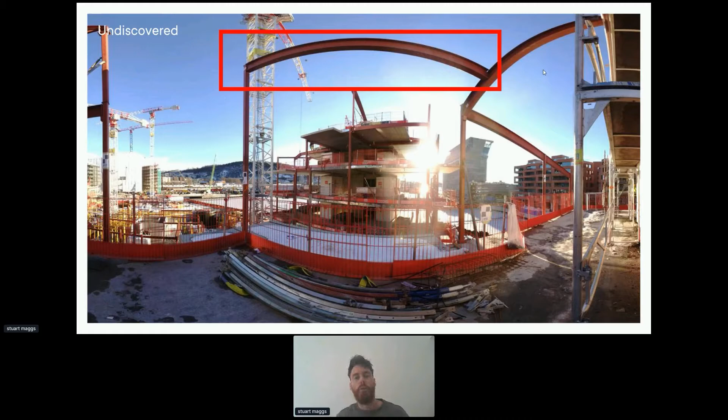This is essentially the cost of doing business, that all of us within the industry accept that these kinds of things pop up and you deal with them ad hoc as they come and put your project at risk. But the really crazy thing about this particular issue is that this was automatically flagged up by our AI-powered software platform so that this issue could get fixed at no extra cost while the subcontractor was still on site and critically had not yet been paid for the work. So essentially, better information to make better decisions to be able to de-risk the project.

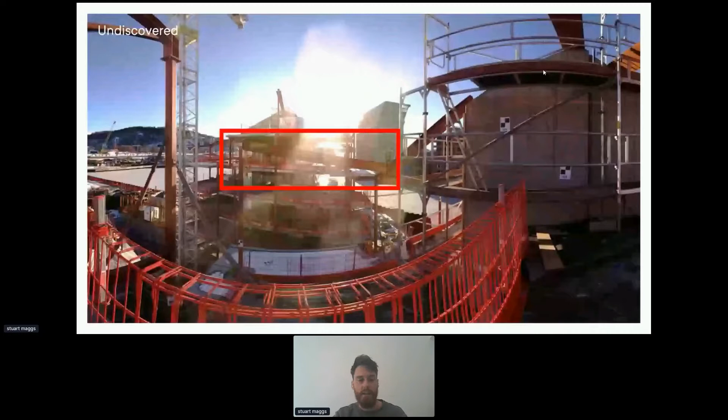But why did this even happen in the first place? Let's take a couple of steps back and ask ourselves, why did this happen? And we believe one of the problems within construction, not all, but definitely one of the larger problems, is that whilst we're designing digitally, we're still constructing manually.

So we put a huge amount of time and energy into building the detailed 3D models of our environment, these incredibly detailed BIM files that we use to be able to construct our buildings. But ultimately, there is a person in the field with a tape measure and a bit of string, pretty much putting things wherever they feel like that day.

And I do not believe that people come to work wanting to do a bad job, but construction is complex. We're talking about hundreds of thousands of elements that are being coordinated in time and space to be built in minus 10 in the middle of Oslo. It is very difficult to match up what you intended to build, which is the BIM, with reality.

And if we accept that that's the reality of how things are working in the industry, it's insane that there's no quick and easy way of comparing what you intended to build to what has actually been built in reality. So this is essentially what we're doing. We are capturing data on the construction site, and you should be seeing a video of a point cloud. This is the raw data that we're capturing on the construction site.

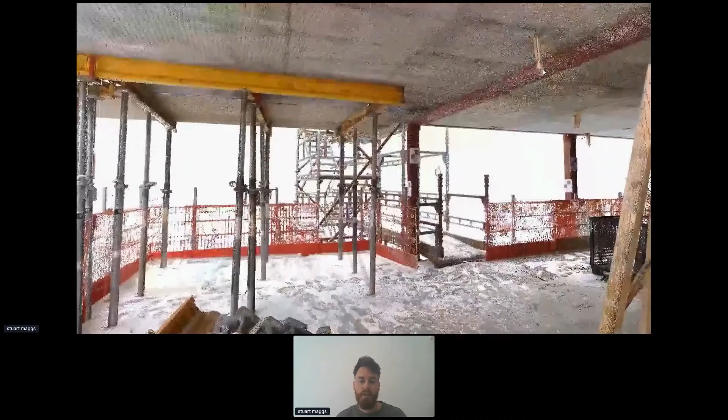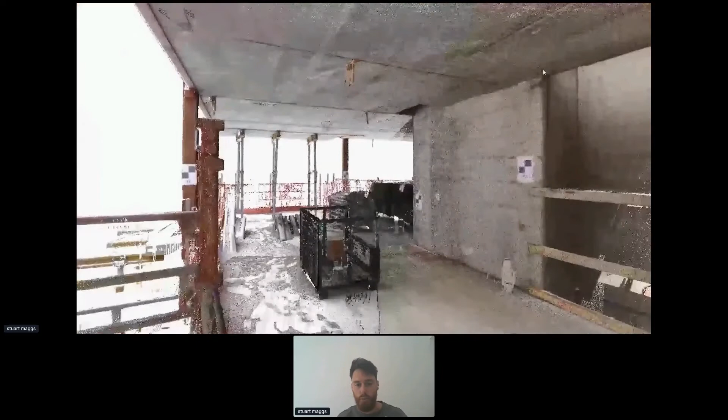I'm sure a lot of you have probably already seen this before, but you can see the clutter and the chaos and the noise. And this is what makes construction so complex and difficult to work with. So we take all of that data, we upload it into the cloud, and we use computer vision and machine learning to start making sense of reality. And this is something that you wouldn't see as a client, but this is to visualize for you what's going on behind the scenes.

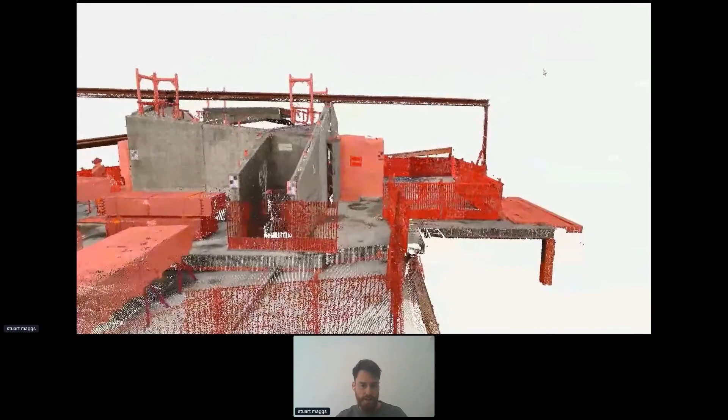So basically, we're taking everything that is not the building that just turned red, and we're putting that to one side because that is not the building. So we're cleaning up and making sense of this complex piece of reality so that we can start to process it and pull out meaningful insight from the project to be able to actually deliver a business outcome.

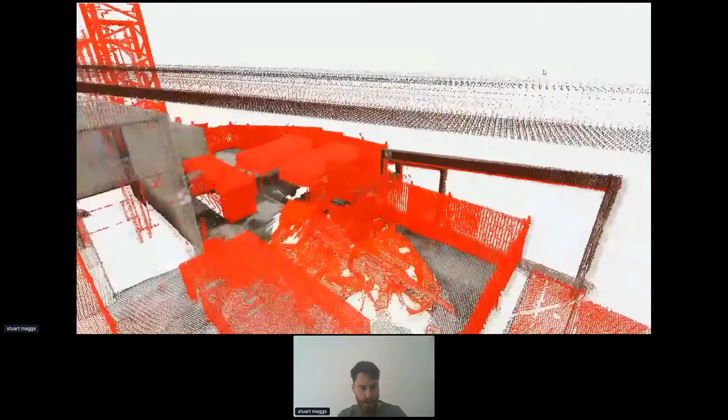So the first thing we're doing, we clean the point cloud, we align it with the digital model, which is the BIM file, and we analyze every single element within the digital model. And we take something incredibly complex and we try and make it as simple and as intuitive to understand as possible. So the first thing we do is we color code everything, which means that everything gray is no data.

That means that we don't have enough information to make an assessment. Probably means that we didn't see it, or we didn't see enough of it to tell you something reliable. Then everything green is within tolerance and has been built correctly. This is good. You should be happy with this.

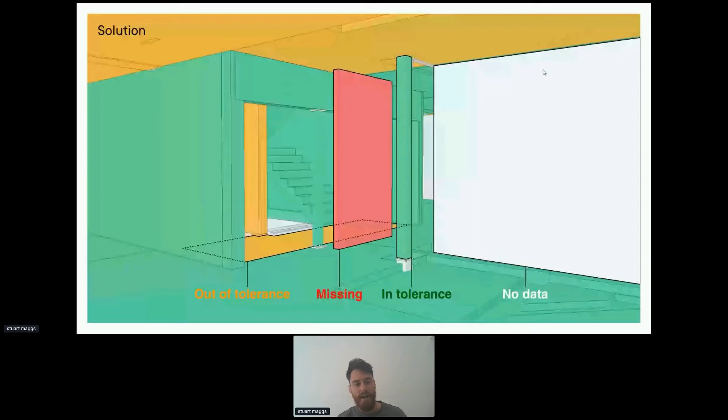Everything red is missing. In this case, this is a structural wall on the 4th story of a 6-story building. This is obviously information that you would like to have sooner rather than later. And then everything orange is out of tolerance and has not been built correctly. So it's outside of the tolerances that our clients have delivered to us.

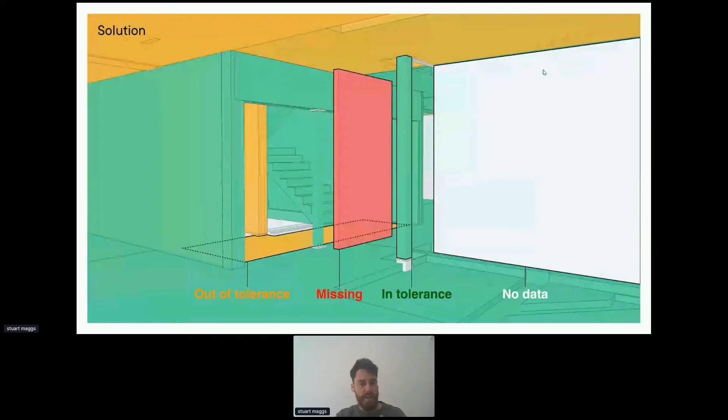And the problem is that what you get on the average project is this: everything is orange and everything is out of tolerance. And this is both overwhelming, useless, and quite likely to give a site manager a bit of a heart attack. This is not answering the question: what is putting my site at risk today, and where do I need to allocate resources to mitigate that risk, like the beam that we saw earlier?

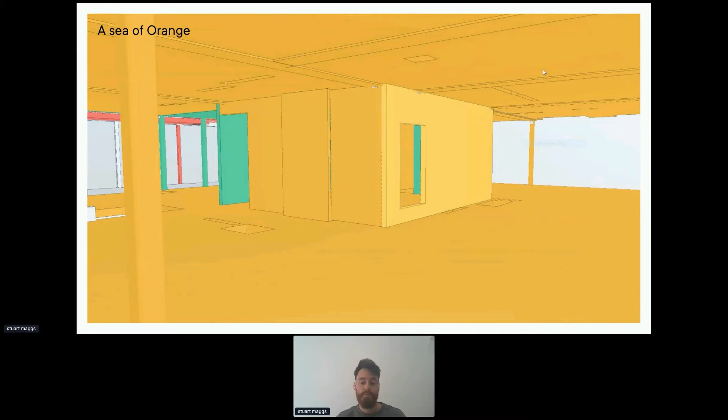So what we do is we make all that information searchable. So I can come in and I can search, and I can see that actually this wall is more deviated and more at risk than all the other elements. It's actually 10 centimeters too close to the central core, which means that the pipes aren't going to fit in

the later stage in the project, which is basically going to mean that I'm either going to have to redesign a whole bunch of MEP, which is the services, or I'm going to have to rip down that wall and replace it, which is going to cost delays, schedule problems, issues with my subcontractor, all of these 3rd, 4th order events that are going to sneak into my program.

So just by catching this early, the immediate direct cost is around 10,000 euros, but we know that that's going to be stretching higher and higher as you go through the 3rd, 4th order events that are going to be caused rippling out from this one particular issue.

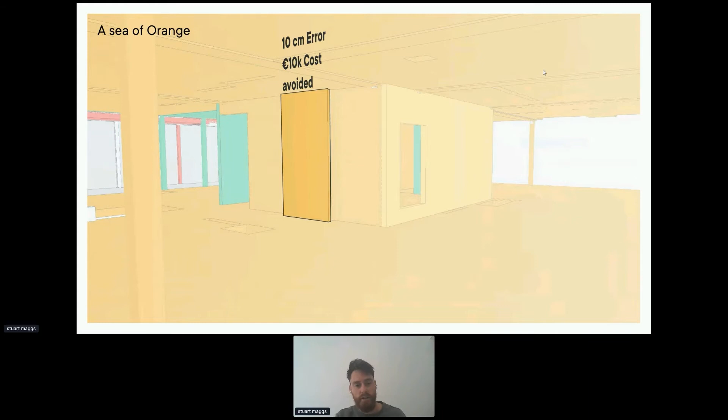So what does this look like on a real project in our product? Let's see. Yep. So this is just a screenshot from a little while ago. It's actually a little bit old, but essentially all of that data is now being hosted in a web viewer. So you have access to the same high quality information, whether you're sitting at home or you're sitting in the site.

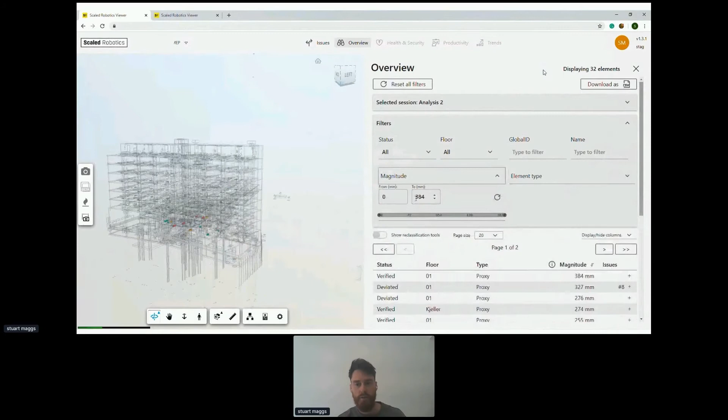And I know on this project we have some issues with the concrete, so I've immediately filtered out from the 2,500 elements we started with just these provisions for voids, the areas where the concrete needs to have a hole for the services to run through. And I've said, show me all the missing elements within that category. And that's now 6 elements. I've double clicked on one.

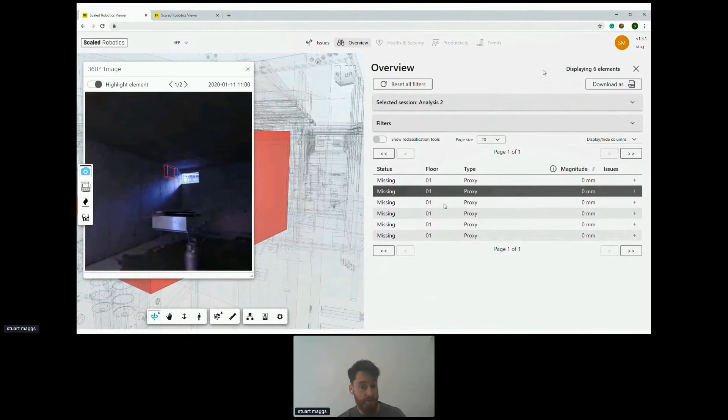I've brought up the image because every single element is automatically tagged with every 360 image it appears in. You don't have to go searching for that information. And then I can actually highlight the element within the image using the highlight element tool so I can see where it's supposed to be. And in 2 seconds, I can very quickly see that there is very much no hole in that concrete.

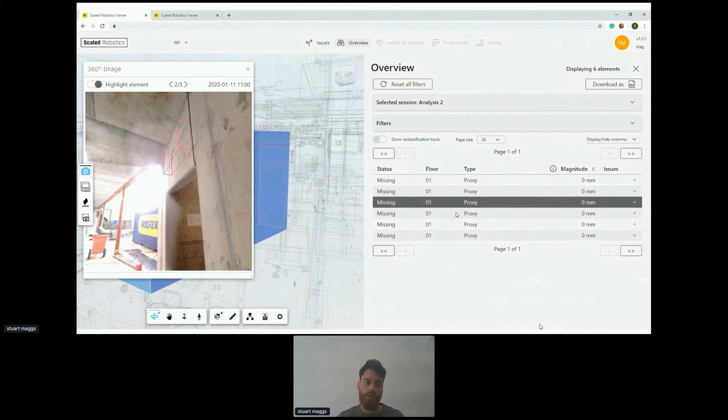And therefore, this is putting my project at risk, and I need to be able to mitigate that risk. So I've gone from having almost no information about my project to having fine-grained control over everything that is putting my project at risk in that moment. A couple of other examples of how we're doing that.

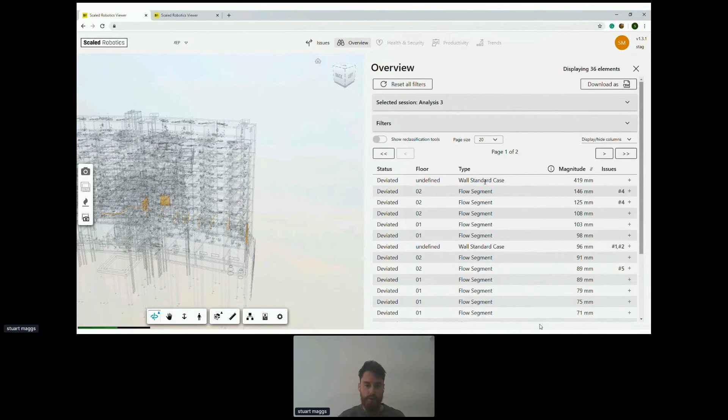We go into element type, we can also filter by specific elements that we're interested in, but we can also filter by magnitude of deviation. So I can say, only show me elements above 25 millimeters of deviation. The ones below, maybe I don't care so much, but above 25, I really do care. That's immediately narrowed down from all of the elements on my site I would need to check to the ones that are really putting my project at risk.

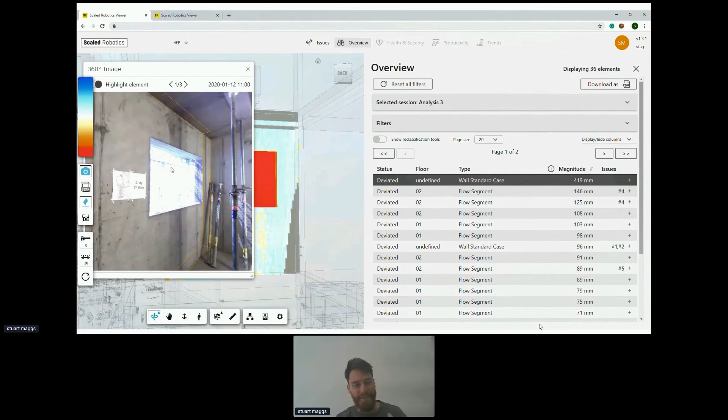Double click on the one on the top because everything's automatically ranked by the magnitude of deviation. It's telling me 419 millimeters out of place. Visualize that with a heat map so that I can visualize all the measurements on that wall. I can see there's a big red lump of missing material. I bring up the image, which verifies what the software is telling me. There's definitely a big square lump of missing material in the middle of that wall.

That is not good. I move on to the next one, having a look at a pipe in the ceiling. It's telling me it's about 9 centimeters out of place. The key thing here is we're communicating in the language that construction is using today.

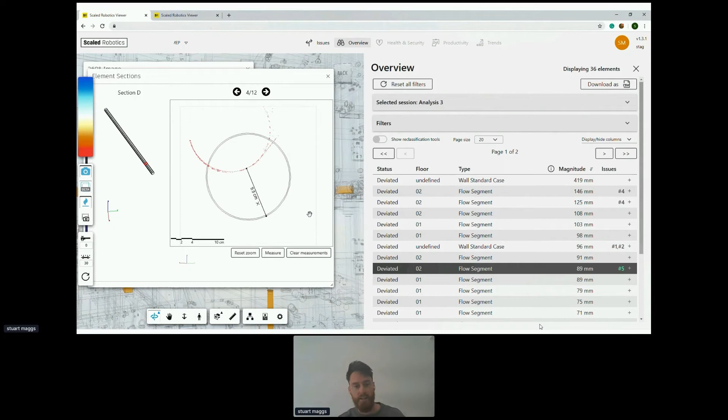We're taking state-of-the-art tools to be able to diagnose what's going on, but at the end, the way that we actually deliver that information to people on site is using 2D sections. 2D sections have been used for hundreds of years, but we're delivering them in combination with this incredibly insightful information. So I can come in and I can immediately say, yes, this duct has actually been moved up by 9.5 centimeters, and I can verify that. So better information to make better decisions to keep your project running smoothly.

In conclusion, it's been a pleasure to present what we're doing. If you have a project that you think that this could have an impact on, feel free to reach out. We would love to hear from you. We're working in the Netherlands at the moment with Dura Vermeer, doing some really awesome projects.

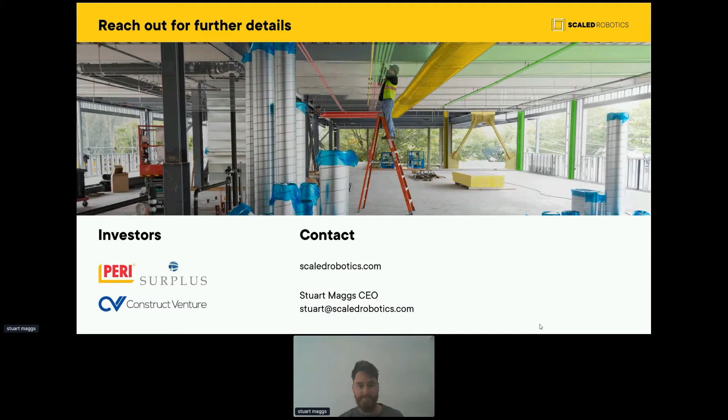Well, thank you very much, Stuart. One question that I maybe have for you. What are the tangible real-world outcomes you have seen your clients achieve with these technologies? So I think there are a combination of different outcomes that our clients are seeing from this. So for example, 2 weeks ago on a project that I definitely cannot name, we uncovered a structural issue with some of the beams, which had completely bypassed all the traditional QA methods that they had within the project.

And if that had gone through the project, that would have been bare minimum, at least 100,000 euros worth of damages. Not to mention the problem that that project could potentially have been structurally unsafe, and therefore you can imagine the kinds of ramifications that would have for the reputation, but also just for the safety of the building. So catching that issue within days of it actually being installed had a huge impact on that project and on the company. Then there are other things.

We process data significantly faster than traditional methods. So something that we are doing on a pilot right now to test this out, we can process data in 3 days turnaround. We're talking about hundreds of thousands of elements in 3 days, what would traditionally take 3 months. So you're getting this valuable information that would have taken you 3 months to get, you're getting in 3 days. So it means that you can completely change the feedback loop that your project has to be able to test those assumptions, de-risk the project and move forward. So we're seeing some pretty interesting stuff popping out over the last couple of months.